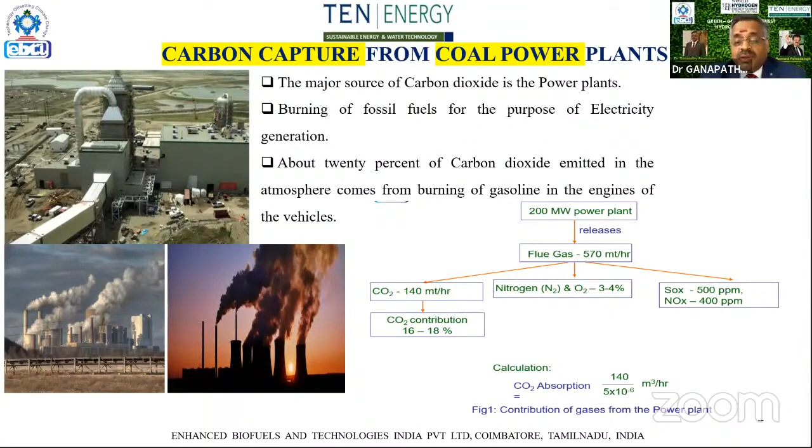If you look at this slide, our main focus is discussing how to capture the carbon dioxide which is being emitted out of coal. This is one of the slides which we discussed long back with NTPC, where Dr. Sonde was the executive director. So this is a source of raw material for our project.

As we discussed, we have 5 areas of expertise. Number one, biomass, where we have 2 areas. One is the cultivated tree species and grasses. Our variety, which we developed, Melia dubia, can produce around 40 tons of dry biomass per hectare every second year. Then the grasses which we selected for biomass can produce 450 metric tons of grasses per annum per hectare. The life cycle of the grasses is 3 years.

Then we have agriculture residues. A big problem today in India is the emission and pollution from burning of stubbles. If you look at around Delhi, it's a big problem. Even today there's a big press release - the government has even given holidays to students because of this pollution emission.

That's another area. Then the third one, very important, is algae. Algae is the one, we can say, that when our Honorable Prime Minister of India wants to go 2070 minus CO2, we can do it even by 2050. Let us discuss this in the further slides.

Then the municipal solid waste, we have the technology, we can convert it. Then we have a combination of biomass, algae, and thorium. The previous speakers discussed a lot about hydrogen from solar power, wind energy, and hydro. But we have a combination of 3 more, which we'll discuss in the future.

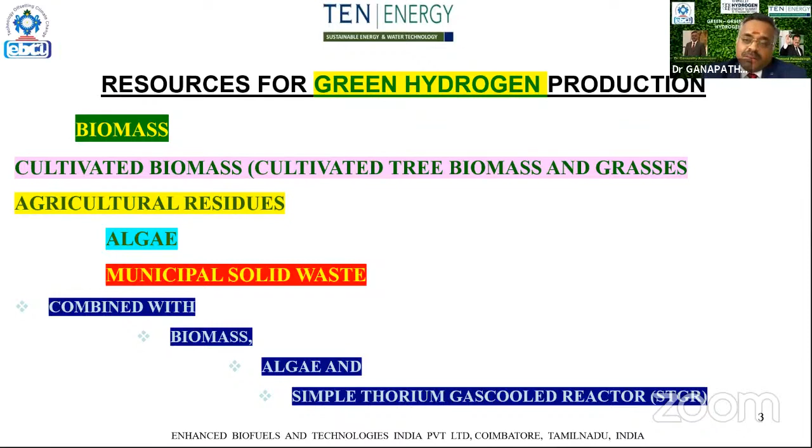So you can look at the biomass which are available. As I discussed, the first 2 pictures talk about the cultivated biomass, mainly for energy. Then you can see the sugarcane bagasse, and the other slides showing burning of stubbles, either from sugarcane trash or sugarcane leaves or paddy stubble, which is a big problem creating the biggest pollution today, spoiling the entire environment with CO2 emission.

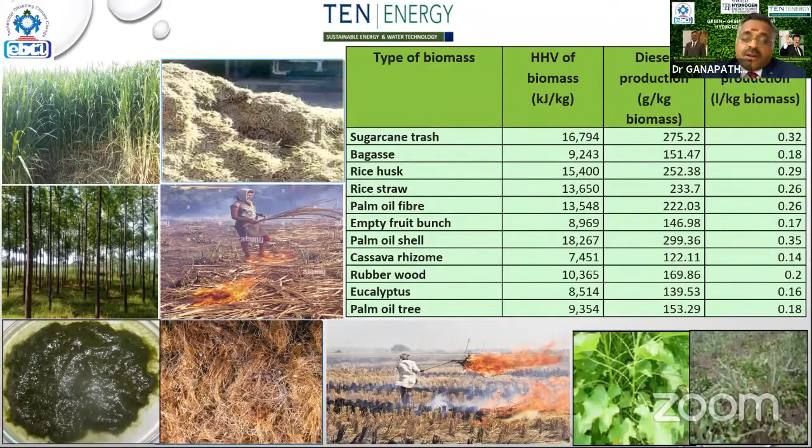Then you can see that there's a green mass, which is algae. Let us discuss about algae. Algae is a candidate that needs actually 2.2 metric tons of carbon dioxide and releases 1.6 metric tons of oxygen to produce 1 metric ton of biomass. So you can calculate how many tons of algae consumes.

If you look at the slide down, each hectare of algae consumes 1,320 metric tons of CO2 per annum per hectare and releases 700 metric tons of oxygen. You can see the picture - we can straight away produce hydrogen fuel from the algae. You can go to further slides.

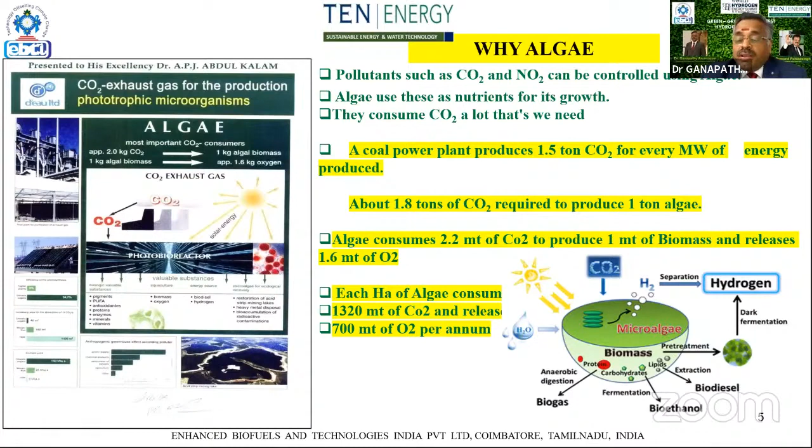So if you look at these slides in the microalgae, there are 2 areas: one is hydrocarbon, then the pharmaceutical areas. In the hydrocarbon, we have direct hydrogen production - you don't need to convert it, if there's a species of Chlamydomonas species, which we have the variety that can produce hydrogen fuel directly. Then you have the biodiesel, which produces the oil. The oil can be converted into a value-added product, which we'll discuss later.

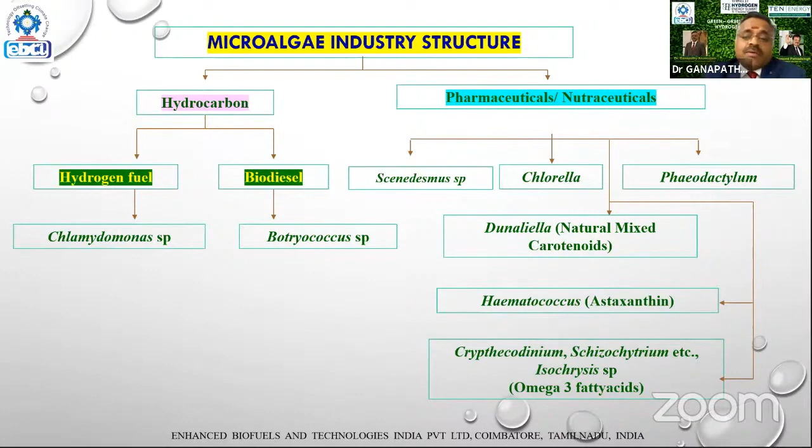Now looking at our technology, you have your main source of CO2 emission, whether from NTPC, steel plants, cement industries, coal areas, sugar mills, or fertilizer industries, which emit CO2. When we put our bioreactor next to that, we bring the carbon and convert it into a fuel.

So we have two technologies: open pond and photobioreactors. Open pond is easy to manage and cheaper, but the photobioreactors are expensive, though they produce a high value edible algae that we can convert.

So if you look at this slide, you have sunlight, CO2, and water convert into carbohydrate, protein, and oil. You can see the application: fuel, chemical, and feed. We can also produce bioplastics from the algae, which is another area we can work on.

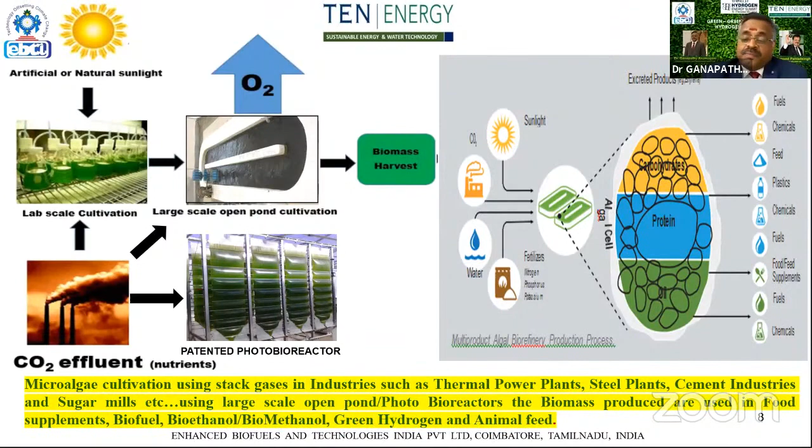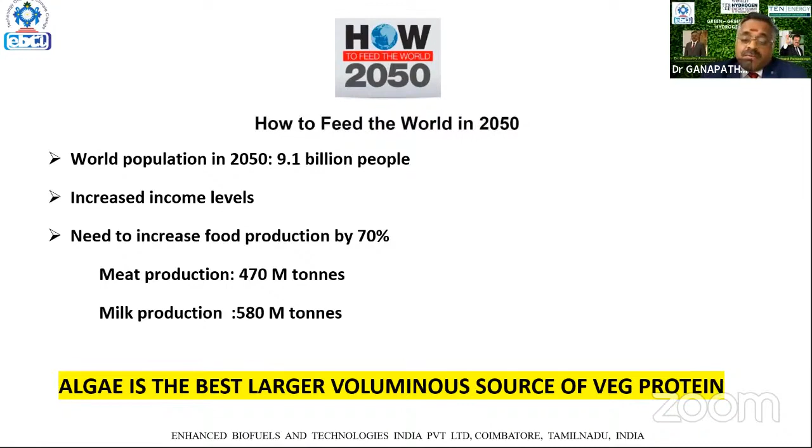If you look at the global food requirement, the world population is going to be 9.1 billion, and we need around 470 million metric tons of animal-based protein and milk protein. But when you look at algae, it gives a very high vegetable protein which supports vegetarian requirements. This is the potential of algae, the market cap.

This is another area which we discuss about the conversion of municipal solid waste into hydrogen. The first is to eliminate the landfills, eliminate dump sites, and convert the entire waste into a high value product. We separate the waste into three components: biodegradable and reusable, and combustible.

The biodegradable waste we put in a reactor where we convert it into manure immediately. You take out the manure and use it for agriculture so you can increase the organic carbon in the soil. Then the second thing is segregatable material.

We segregate it and give it to the industry where they can reuse it. The last one is waste material which is non-recyclable, and we convert it into energy. That last one is combustible material.

So we put our pyrolysis plant, and this is a custom designed technology of our own where there is no emission in any area. It's a continuous pyrolysis where there is no CO2 emission.

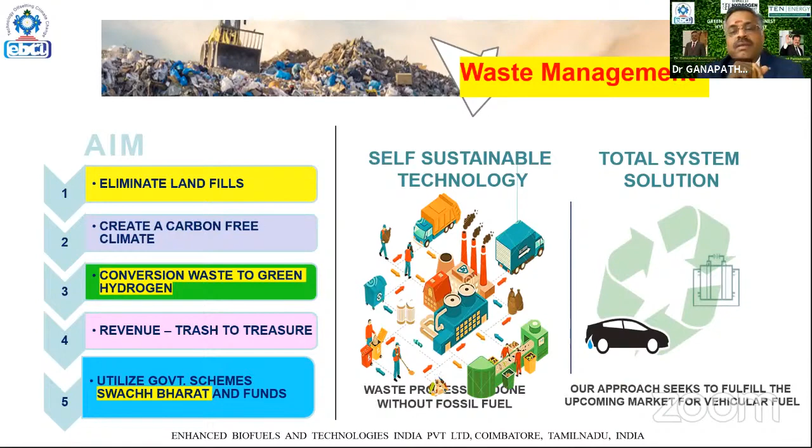We convert the biomass into products like oil, carbon granules, and hydrogen fuel. The carbon granules are very much required in agriculture to increase organic carbon, particularly in the sugar industry. If you supplement the carbon, you get a better sugar percentage.

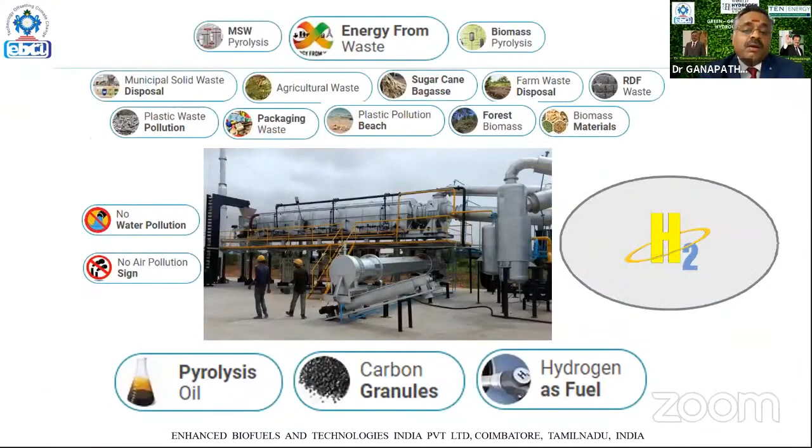So this is the general picture of how, when we produce hydrogen, it is applied.

This is another area we are working on. Our partners are in the Netherlands. They have very good technology about thorium, standardized, well established, and demonstrated. They convert the coal into graphites, and the graphites get embedded with the thorium, which is 100% zero emission.

In this case, we are not burning coal. The conversion of energy is such that when we buy the coal at $250, we can convert it into $250,000 worth of energy.

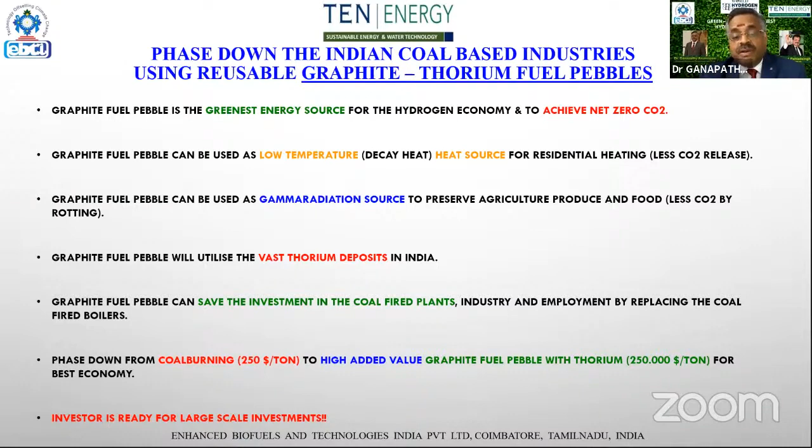So this is what we are talking about. Normally, thermal energy works by burning coal, where the cost of coal is $250 per metric ton. Assuming the graphite pebble can produce energy worth $250,000 per metric ton, and we are not burning the coal, we can recycle the coal back so that with a limited amount of coal, we can produce better energy.

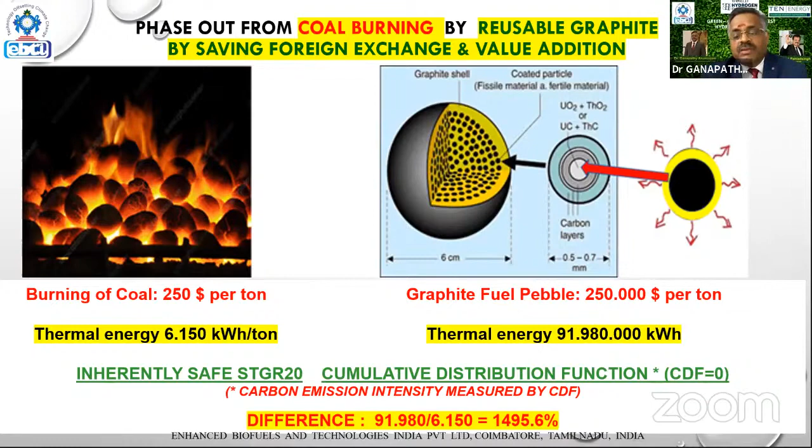So we are talking about green, greener, and greenest. The green is solar, the greener is wind. The greenest, combining together, is producing energy using thorium-based reactors.

The coal is used as graphite to build the STGR, where CDF is zero. Then there's the safe fuel and the pebble containing thorium, where we embed the thorium inside the graphite, and use it as energy where the coal is not burned.

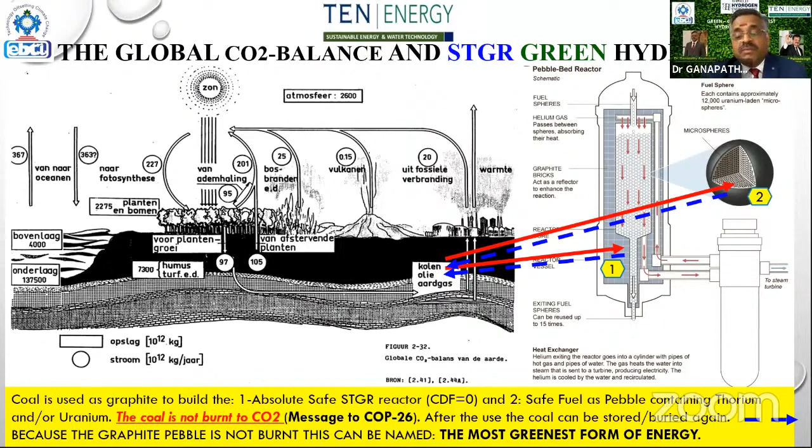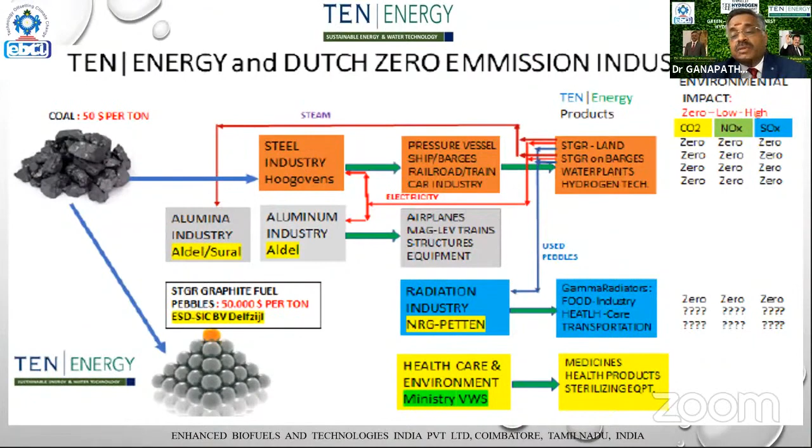So it is 100% green technology. These are all the industries where the STGR is used, where there is no CO2, no CO, no SOx, and no NOx. That's our idea.

This is the combination, as previous speakers already discussed a lot about wind power and solar power. In our system, wind and solar power already exist, and we add algae, biomass, and municipal solid waste. So we have 6 different candidates which produce hydrogen, and they can convert it into high value energy.

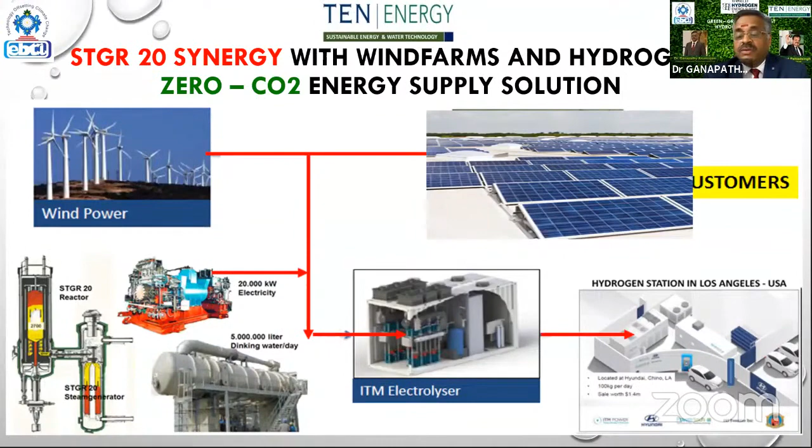These are all the applications. This is one of the areas we are planning. We had a good discussion last week with our Minister of Road and Highways, where we planned a technology where every 200 kilometers we fix this, collecting the biomass and municipal waste available. We also collect biomass, either cultivated or agricultural residue, whatever is the cheapest source available, and convert it into energy. Then we put a charging station that will supply power to the transport vehicle. That's the plan we have.

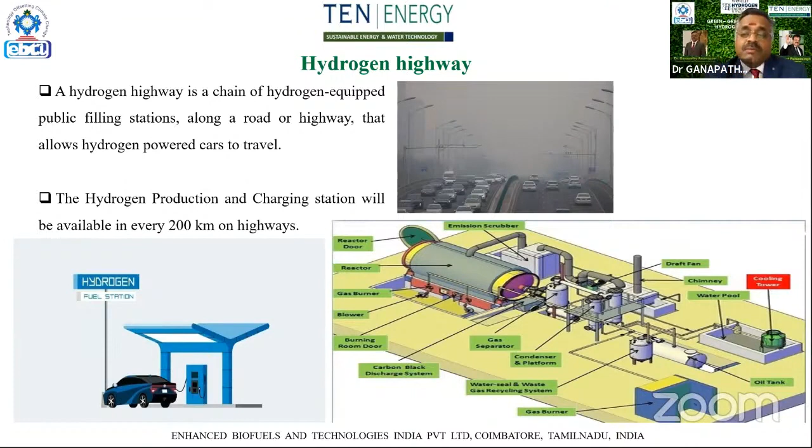We are going to have a demonstration shortly, then move on for the whole world. This is a general slide, so there's nothing much for me to talk about here.

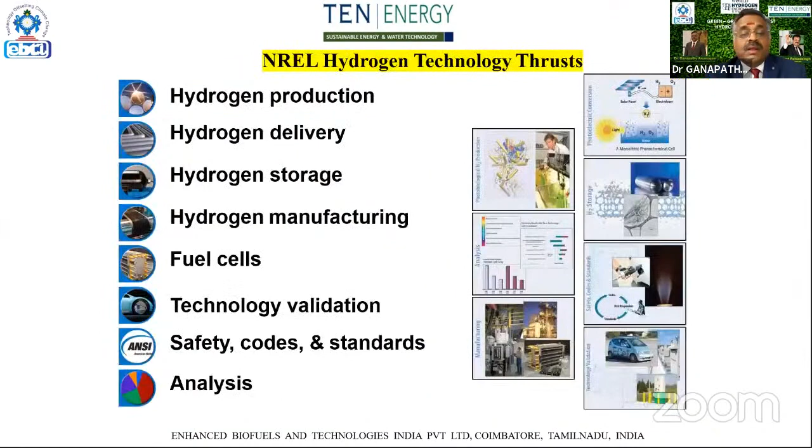In a nutshell, the technology we developed using algae or biomass, we initiated this in 2003. Probably we may be one of the few companies who thought about it. We brought a scientist from the USA, an expert in algae. He came and certified that we have the best source of raw material to produce hydrogen, in 2004.

We were looking at all these things, and we invited our former president, Dr. Abdul Kalam. He came and visited our facility, and he declared that EBTI is a pioneer in green fuel technology. That's a big achievement we made in our lifetime. So this is where we are today, and we are moving ahead with all 5 technologies.

We have been invited by the Government of India to initiate this work. Probably in a month or two, we'll be on ground. Thanks for your time, if there are any questions, please ask.